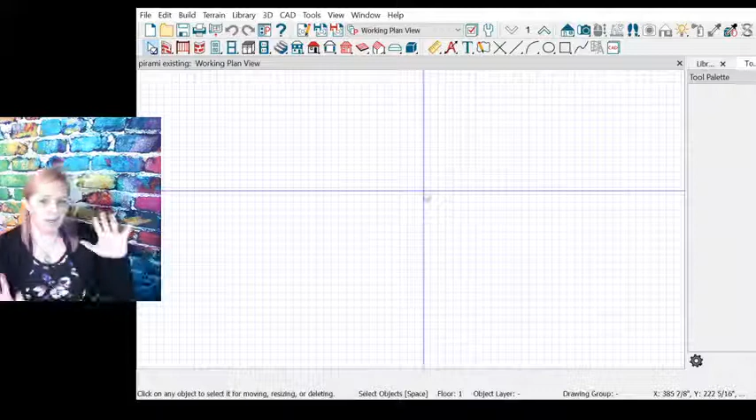All right, so we are here. We are getting started in Chief Architect. Hang on one second here. Awesome, okay. So as usual, I've already got my Chief Architect up and open, and I've got my files saved. What I'm drawing up first is the existing plan.

So this is my sketch of the existing conditions and measurements, so I can get started on drawing this. I'm going to use my exterior wall tool to just real quick start out.

This is a weird one because most of the time when people draw a house, you draw the front door down to the front, but that just feels weird to me on this project. So I'm actually going to draw it the way I feel like it. For remodels, it's a little less standard or stringent, I guess.

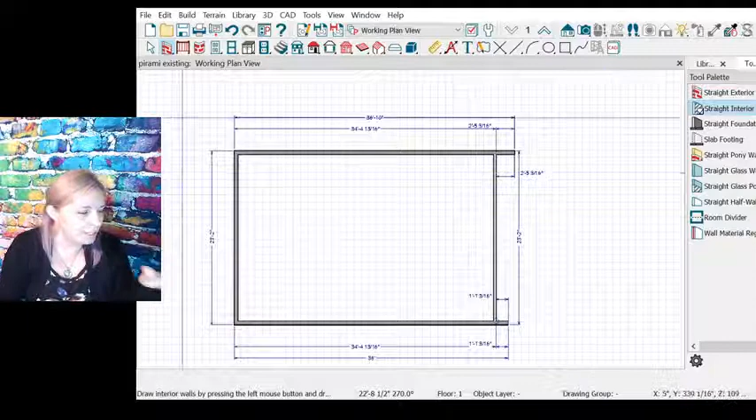So anyway, I've got my rectangle indicating my space. I guess technically I don't really need those. So I'm just going to drag this out here and we'll make it a nice even rectangle.

Now what I need to do is go in here with my measurement tools. First thing I want to do real quick - this is the existing plan, so I'm doing it basically like an as-built. So there is a long wall that connects the two halves of this house. Down on the far end, over here, are bedrooms, bathrooms, all the usual.

And then the front door is down here. This is a half wall. So then this right here is that split staircase.

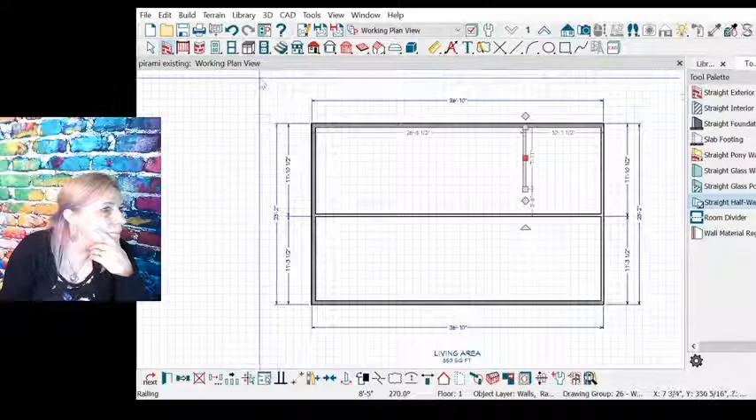I'm going to go ahead and start getting some dimensions on here. I'm going to switch over here to my measurement - interior dimension. Real quick, throw a few of these lines out here. Okay, and then that's a half wall, and we'll try that like that.

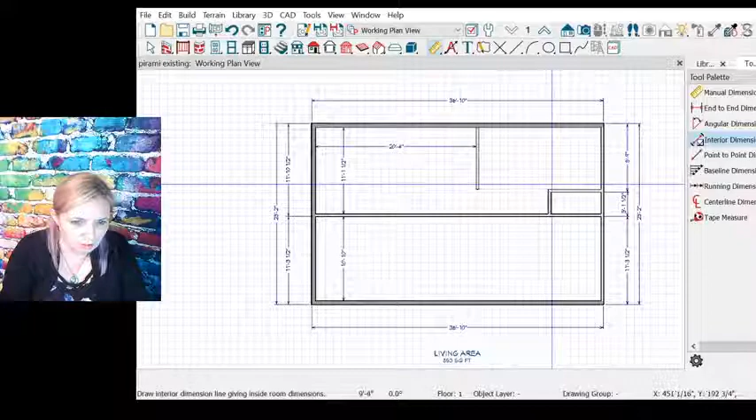So first thing we need to do is move that half wall over. And then from here to, well, some of these don't matter as much because we're not really messing with the exterior walls, we're really just messing with the interior space. So once I get my perimeter good, I'm not even worrying about what's on that half.

Okay, so you come up the stairs, we've got that. This here is off of the center line, and this one over here is 13. So this right up here in this upper left corner, this 13.5 by 20'4", that is the existing kitchen. So yay, we've got that.

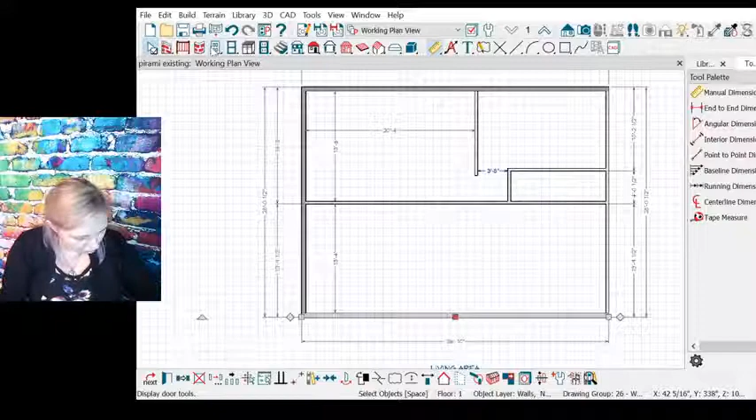Yeah, my drawing is totally whatever. It's a good thing I remember what I'm doing because my drawing does not exactly match. Oh well, okay. This is a 3'6" opening.

And then over here, there's a hallway and like that. So this pretty much lines up like that. We'll say that hallway's like that. Okay, there we go.

So I think we're doing pretty good there. All right.

There, now those two line up. Basic, oh there we go, right like that. Okay.

So this is our existing space. I'm going to quick hit save so I don't forget. There is a door over here that goes into the garage, so this is an exterior door. It is 2'8". Actually, I should change that real quick. It doesn't have that silly window thing, it's just a panel. We'll call it a panel door. All right, and the door swings that way.

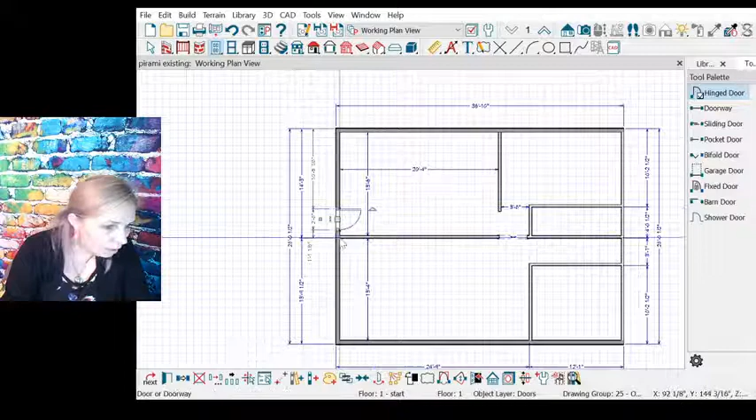And it is 6 inches from the corner. 6 inches from the inside corner over here. So 6 plus 4.5 is 10.5. Okay, there we go.

And we want to get that door location correct because that is staying, and that's going to affect the rest of the layout of the cabinets here.

Normally I would worry about the stairs, but since we're not, it's okay, U-shaped stair. I think this one does go clockwise, so we'll put that over here. Actually, yeah, we'll do like that.

Now that is, might have to tweak this a little bit because I don't think that dimension right there is correct. Yep, that's 10'3", and should be 9'6".

So right there. And then I'm just going to make this match up. Like I said, we're not actually changing the stairs, so they don't have to be perfect. I just need to have accurate measurements of where the walls surrounding the stairs go.

So there's that. And then, again, not that it really matters, I'm going to show it closed, but there's a little closet right there. So I think that's pretty much the easy stuff.

I'm going to go ahead and delete all these exterior dimensions because those don't matter, and in fact, some of those would actually be incorrect. And I'm just going to move the ones that I do need out here.

Now, we're not changing any of those dimensions, but since replacing flooring is part of the plan on this particular project, I want to make sure I leave those so that when they take these plans to the flooring store, they have accurate measurements so they can calculate the square footage of what they need.

And I guess technically I could show the front door down here. So.

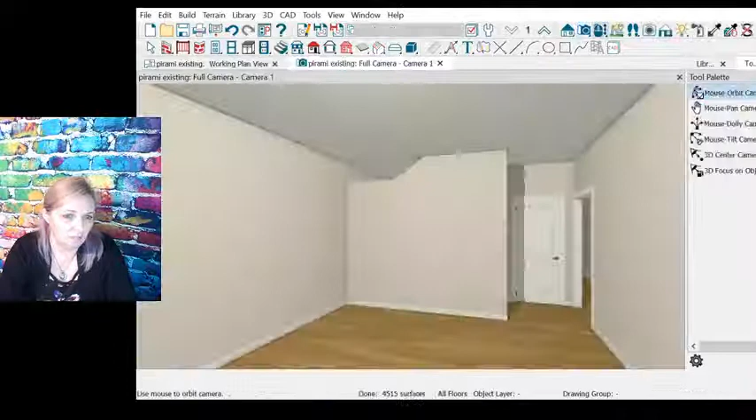Okay, that's not going to look 100% right in 3D because actually, let me see here. Yeah, see that's showing that it's actually down below. So in order for that to be accurate, hang on one sec.

Build. I'm going to build a new floor. I don't know, cancel, no, I don't want to build a new floor. I want to build a foundation. There we go.

And the only reason I'm doing that is because I want to take this, put that down here. I'm going to really quick delete that.

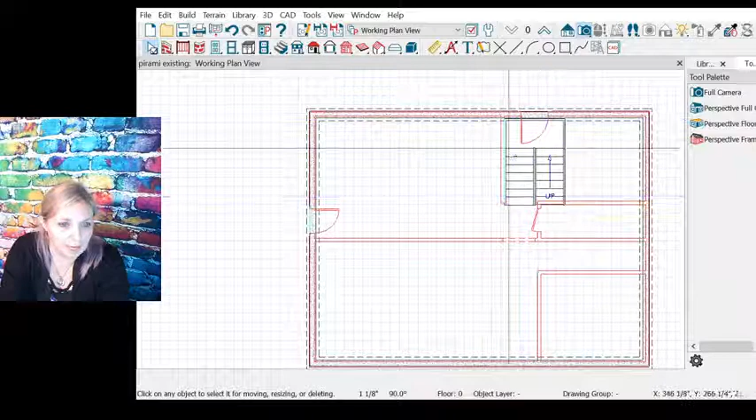Check my reference display so I can see, and actually you can see because that line is green, I know I've got my overlaps correct. That staircase is exactly where it needs to be.

So now, really quick, all I have to do is use this tool to close off this staircase right here.

I'm just building this little interior wall to frame in the staircase properly. And then right here, when I click on that, I'll call it open to below. But I don't want the room label to show, that'll get too confusing. But there we go.

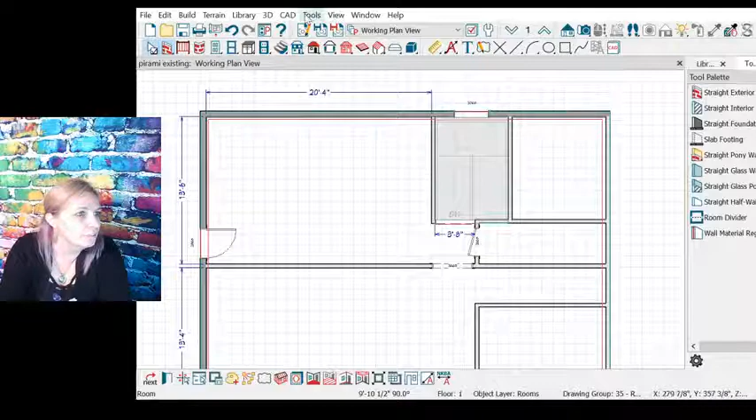So now if I turn off my reference display, perfect. And then the only thing that did is it got rid of that 9'6" dimension on that stairwell wall.

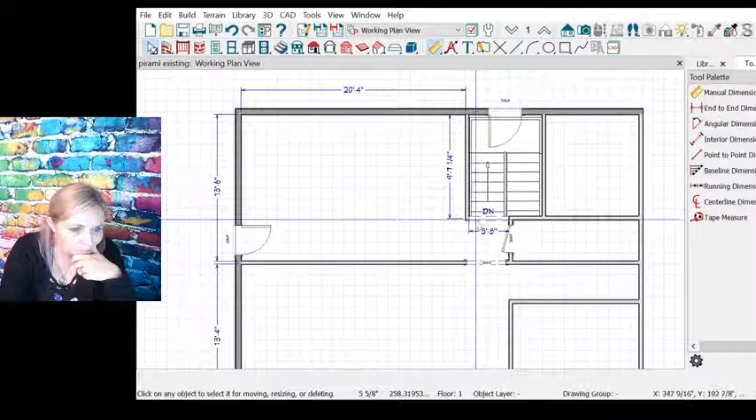So I just need to get that correct. Okay, there we go, so now it's correct.

And then I just need to move this over here so it's kind of out of the way. Perfect, so now my staircase is drawn properly.

You can see where the front door of the house is. You can see that that's a half wall. If we switch over here to 3D, now you can see that is correct, except that door needs to go down like that.

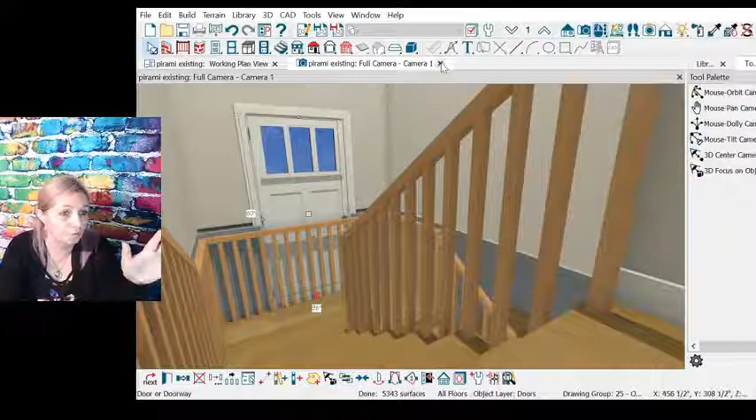Like that. Okay. Now, obviously, the foundation's different, but ballpark for what we're doing for this remodel, that is actually going to be pretty accurate.

So actually, if we switched over to this view, there's a better view of it. You can see, and obviously there wouldn't be railing on that, but

let's see if I can do that from this view. Remove railing from selected edge. There we go. So there we go, close enough. Cool, okay, so close that out.

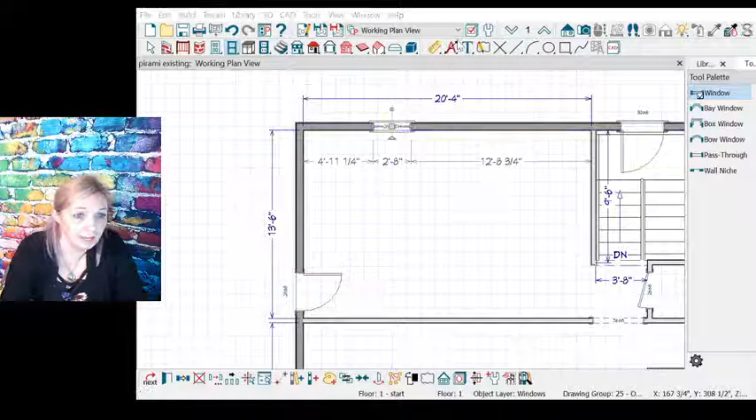And then the only thing we have to go back here, we need to do a couple windows. The existing plan has a window over here. It is a slider, not a double hung. Yeah, slider, and it is 3 foot 11.5. The height is 3 foot 2.5.

Okay, and it is 2 foot 9 from the corner. Then we have a bay window right about there.

This one I did not get the accurate total dimensions on because it's going to go bye-bye, but I need it to be bigger than that. It was, yeah, I'd say it was like that, pretty good sized. But they're going to patch that in.

With my new design, we're actually going to copy the kitchen window and mimic that in that spot on the wall, because right now we've got cabinets over here, and this right here is sort of the dining space. I think this is actually a little further over. Yeah, like that. Okay, so now we need to start throwing on some cabinets.

So under the window here is the kitchen sink. It's a 36-inch cabinet. Really quick, and this is totally a personal preference.

Hold on, there we go. I hate cabinet labels. I'm not a kitchen and bath cabinet salesperson. They have their place, but for what I'm doing here, I'm trying to show the overall kitchen. I don't like having that label on there because that just gets confusing.

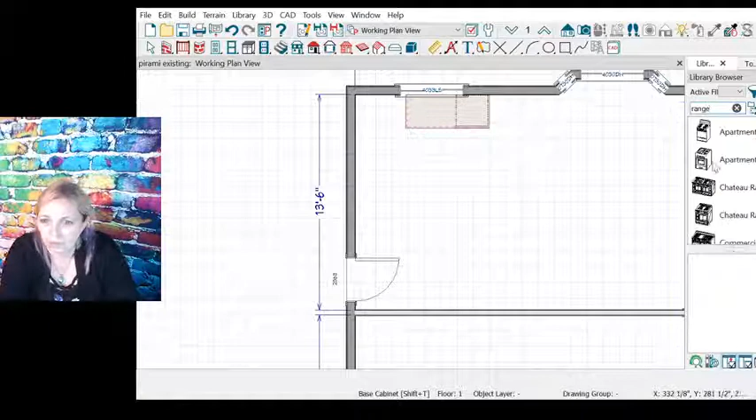We obviously have a dishwasher, so we're going to flip over here to our library. Throw a dishwasher in here. We need an electric range over on this wall. We also need a fridge.

Okay, 12. Scooch that. So I think this is a 15. Yep, 15, yay. And 12, yeah, so that's about right. So those cabinets are not big. That is really crowded in over there.

Then there was that, and that. And then I'm going to turn these facing this way. Okay, so there's that. Then over here we had, they had added this in later on. This is, I believe, 3 foot wide.

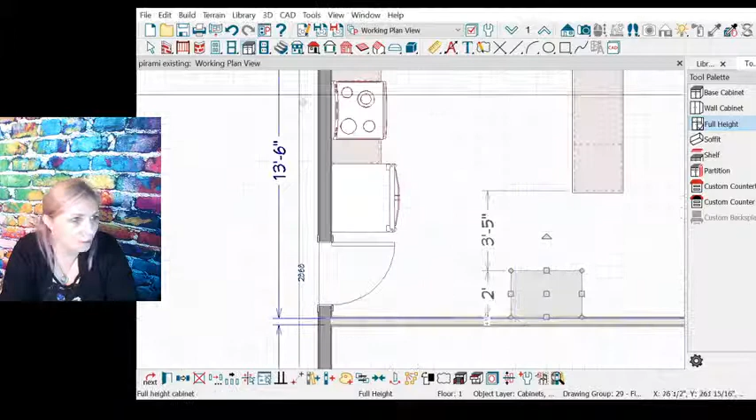Along with your standard base. And again, I think this was maybe a little wider as well. This one had an upper. And then over here we have a 12-inch upper there. This one needs to be shorter because the microwave goes underneath it, so 36.

Let's try 24. Let's see what that does. And I definitely remember having that corner unit because we had a discussion about how pointless some of those corner unit ones are, but all right.

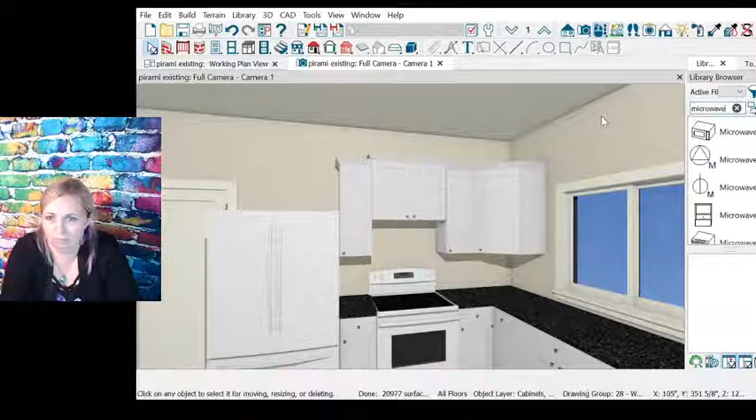So in 3D, come out here and look at this. Now we see the microwave real quick. And that is okay. Technically, I think the microwave's a little bit too low, but in my drawing, I'll make it right.

So, and we do have an upper cabinet here above the fridge, and it is 24 deep. Okay, so that looks correct, and then the only other thing is they have a countertop that extends out just a little way.

So actually I think maybe this window is just a little bit too large. Let's drop this down to like that. Okay, so this is the existing kitchen.

And then this is the existing family room. There is a sliding glass door over here. And there is a fireplace down on this end.

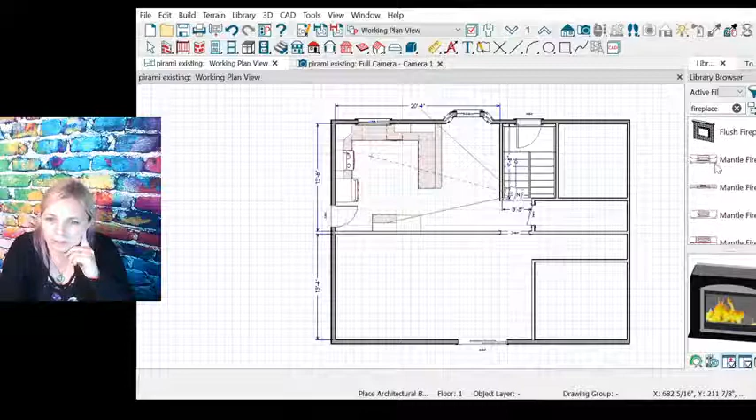So let's, some of these are so elaborate. You wonder why they think that's the average template. Let's do that one.

Okay, so that's just about centered. There's no windows on that exterior wall, and the wall where the fireplace is, that of course backs up to the garage. I'm gonna leave that alone.

So I think that pretty much is, actually I think that might be 1, 2, 3, 4. Yeah, it was about 5.5 feet from that back door. So there we go. I am going to go ahead and save this.

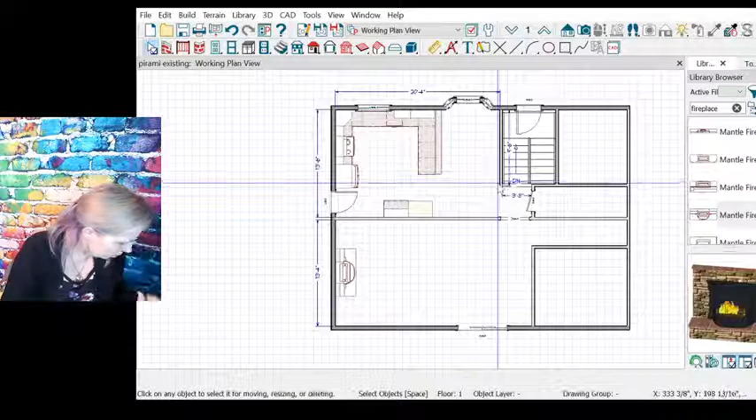I don't see anything else right off the bat. I've got my dimensions here and there. I don't see anything else that I'm missing. 10 foot 6, so 2, oh, sink. There we go. So 2, 4, 6, 8. I'm off by just a tiny bit here. I think that's a smaller cabinet.

There we go. 2, 3, 4, 5, 6, 7, 8, 9, 10.

Okay, all right. So this is our existing plan. I'm going to go ahead and hit save, and then I'm going to save as.

And I always do proposed. Sometimes I'll do version 1, version 2 if I'm a little concerned about whether they're going to like something, or if we talked over multiple ideas. But the day I was at the house, we actually had a really clear plan of what we think is going to work for this space. So for right now, I'm just going to leave it as proposed, one and only, not worry about version 1, version 2. If I need to later on, I'll do that as well.

So, all right, we are there. We're moving into the proposed plan. So now I'm going to start deleting a few things.

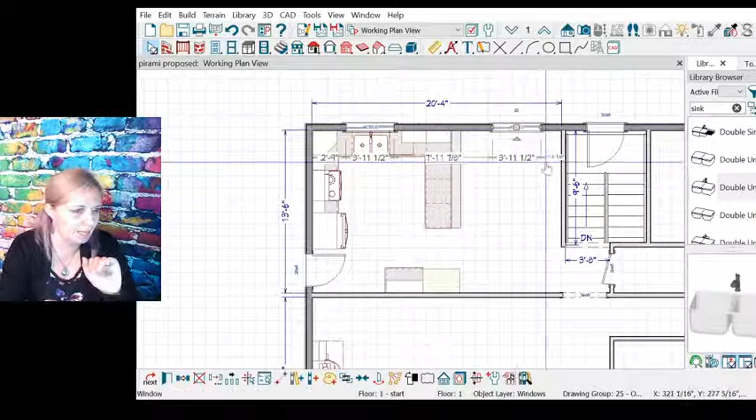I'm going to delete this bay window. I'm going to copy and paste this other window, and we'll figure out the exact layout or dimension here in a little bit. Right now I'm just going to make it 8 foot between the two, so we'll call that good.

The other thing we want to do is get rid of this, and then this. Instead of having the big giant long wall, first I'm going to delete this doorway, then use my break to come over here and peel this back. Sometimes it doesn't like that.

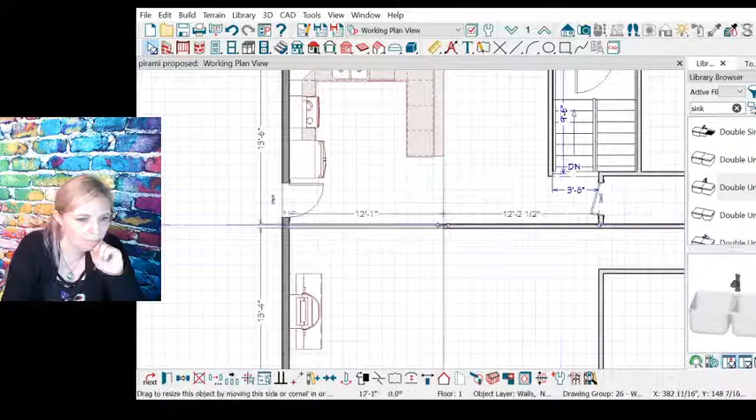There we go. And we decided we wanted it to be 5 foot long from that corner. The reason we want to keep some of that intact is because although we're trying to open up this space, the way that door comes in from the garage, we want there to be a little bit of a space for a coat hook, letting the kids hang things up there by the door, and to create just that little necessary bit of separation between the kitchen and this living room.

Create just a little bit of a nook in this corner for a plant or whatever, and then the furniture will be what defines the rest of the space.

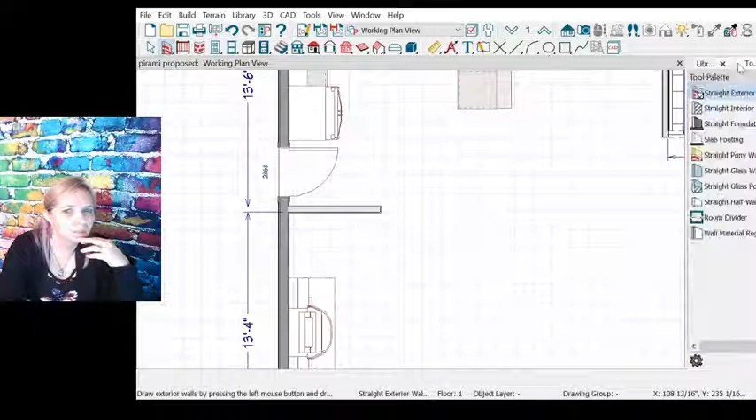And we did talk briefly about doing just a little tiny hook on this, almost a piece of trim work more than wall, if anything. Like 6... oh, I want it to be... yeah, I don't want to move that, I want to move this end.

There we go, so we'll do it like that, just enough to sort of frame that. I don't know if we'll actually frame like a 2x4 wall or if we'll just use a piece of molding or something, but just something to kind of cap that end to contain those coat hooks that are right there. But that wall has not moved, so that's good.

Okay, so that has opened that up. We don't really need the invisible wall thing there because this is all one room. So now we have that space.

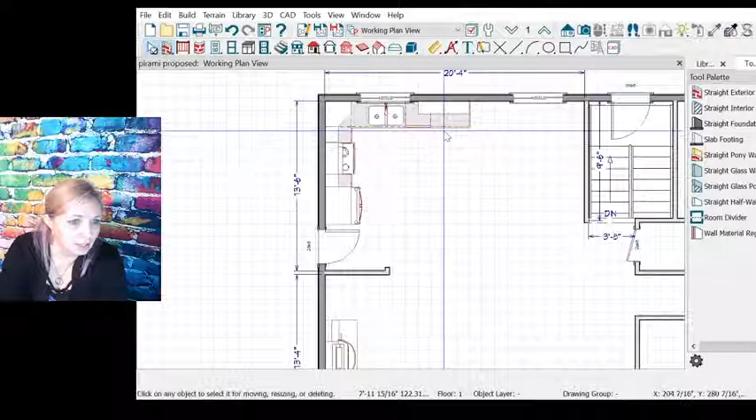We're going to get rid of this little countertop that's here, these cabinets, this cabinet, this cabinet. We're going to change that later. Yeah, let's get rid of that because we don't want that corner one we talked about.

Okay, so then what we're going to do is move this, the fridge, over here, and this is a 12-inch base. I like that. I think we need some separation between the dishwasher and the other.

So this is that upper cabinet, and then we're kind of going to mimic this on this side. And we had talked about possibly turning those into wine cabinet ones.

So when we get to the elevation view, I'll make that look really awesome. So it kind of flanks the fridge.

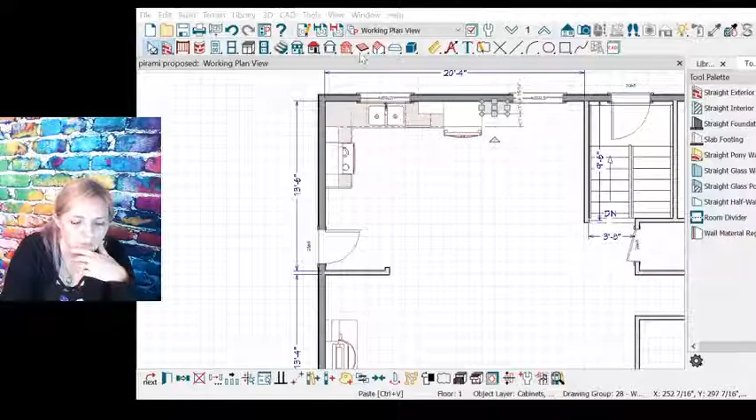And I'm actually going to make that just a little bit narrower. I think we're going to go less than 24, maybe like 18. And do the same thing here.

Because we're going to be adding a lot of storage in this island, I'm going to scale back a little bit on some of those upper cabinets, because I think it's going to make the kitchen feel much more open. Although I am going to do one here.

There we go. Now the other thing we're going to do is get rid of, hold on, see, now I'm flipping over to my proposed sketch.

For what we were thinking about doing, the range, we're going to have to switch to a different unit because that is a range that is not a flat back. That one wouldn't work in the island. There's my microwave, so I just got to pull out a few of these things here.

Let's make that a 2-foot base. Make that a 2-foot base. Actually, let's make this a 3-foot base.

And then I'm going to do full height, and do those there. I'll probably do a little bit bigger.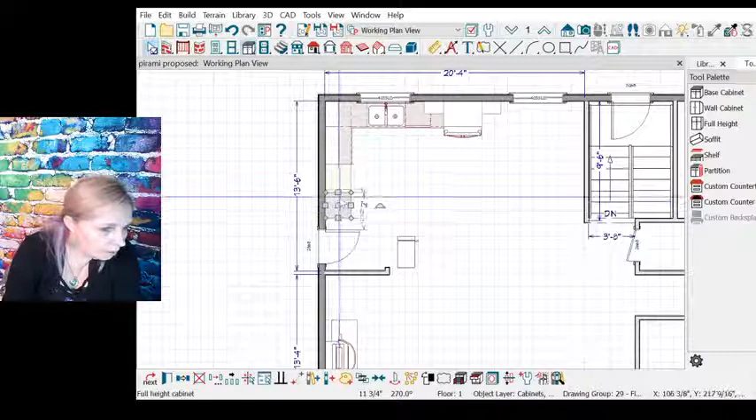Let's do 2'3" and 2'3". There we go.

So if we're looking at that in 3D, you can already see how much different that kitchen looks. But that gives us those double height pantry cabinets, which are amazing. You can get so much storage in there. And then I like how that opens up around the window better, how it kind of dies into the corner.

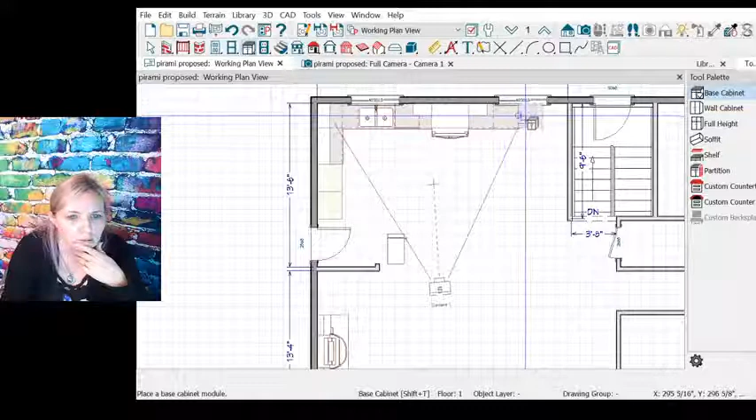Yeah, that's really cool. Okay, so then we'll go back here to this plan. Like that. And we're not going to do any other upper cabinets because of where we want that window to be placed, because I really like the symmetry.

There, look at that. So you've got this unit right there. I'm going to change this just a little bit. So front, sides, back, we can do... Actually, what I want to do is this, because I remember trying to do this before, and it wasn't so much what was on the inside, it was just by simply changing the door.

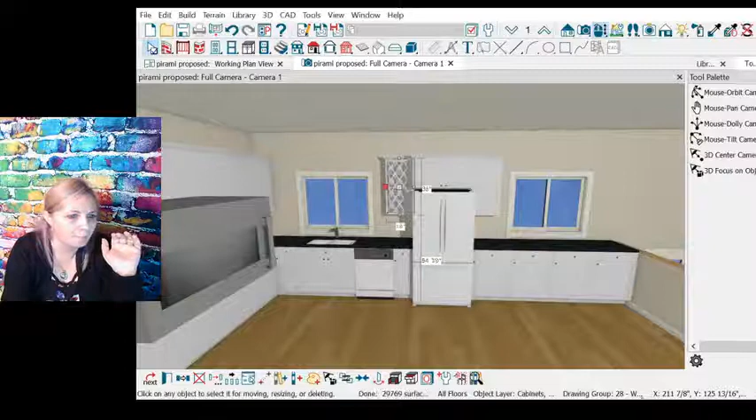Yes. Ha! There we go. And then I'm going to copy and paste. Perfect, okay.

That looks really cool. And yes, I have a microwave floating in there, but that's okay.

All right, so now we're going to do the island. So I'm going to start by placing my first cabinet roughly there. And the reason I started in front of the fridge is because that's going to be the biggest pinch point in this kitchen, so I'm going to do 3'6".

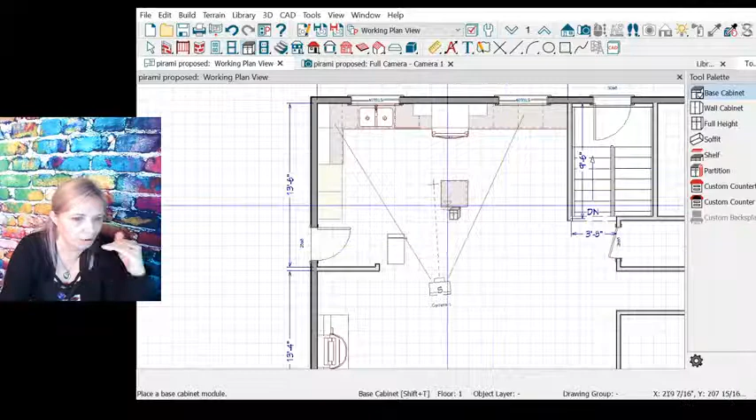If you can do up to 4 feet, it's ideal because then when you've got those doors open, you've got space behind you. But if you can't, 3 foot's the minimum. So we're going to start with 3'6" and then see where this all pulls out, and then go from there.

So we know we need that. I also need an electric range without that back panel, because you see how this one here has that upper piece? Can't do that on an island. So here we've got this, and we've got the oven right next to it.

Now we need a cabinet on this end of it, obviously. And it looks like we've got a little more space, so let's try one more, because I think what we figured out... 1, 2, 3... 1, 2, 4, 6, 8, 9, 10 and a half.

So we're at about a 10.5 foot island. So let's check our perimeter, our measurements here. We know that here we've got... come on, let's see if it lets me do it. Okay, well that's 4'4", that's nice.

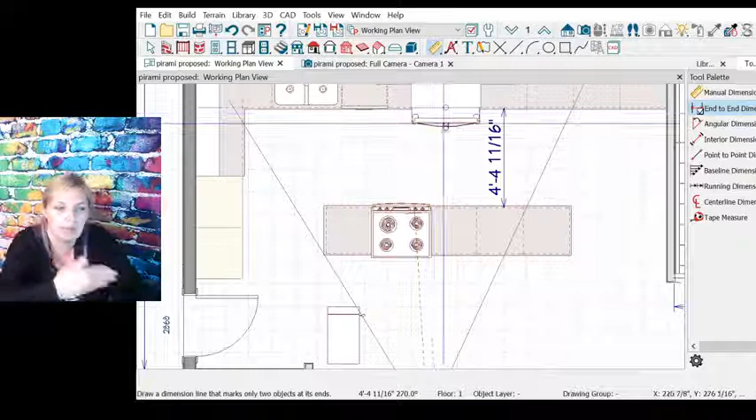The client might look into a counter depth fridge, which would save us a little bit of space, but having these two appliances close like this, the more space we can give it, the better.

I'm going to delete that microwave because actually we're going to use an under cabinet, I believe. So actually I'm going to delete this one right here. There we go, microwave base.

And then, I don't know if she's going to do a built-in or what, but let's see if we can. And I don't know why these templates, they're...

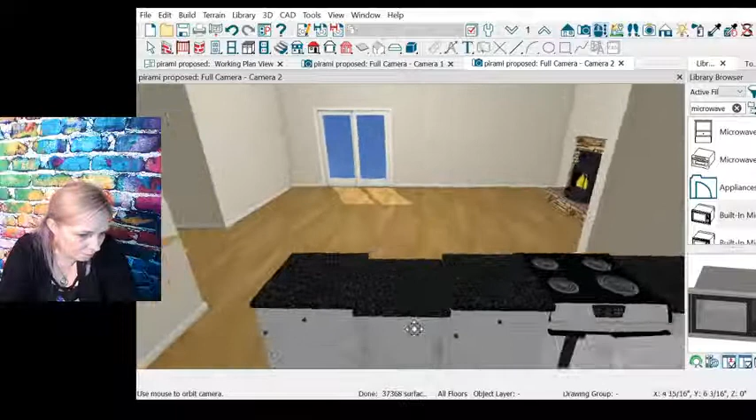Too short. Seriously, cabinets are 36 inches tall. Also, the toe kick is only 4 inches. Some of these templates are weird. See, now that fits. Okay, microwave.

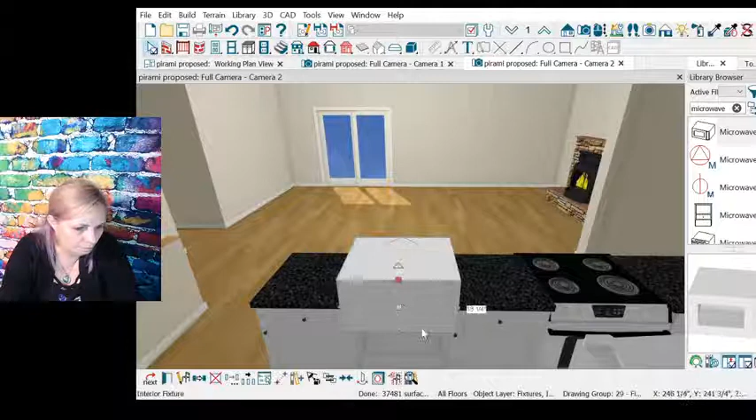Well, you know what, it might not let me, but I'll fix that on an elevation later. But look at this right here. You can already see how much more open this space is. So you'll be able to sit here and see what's going on there. I think this is awesome.

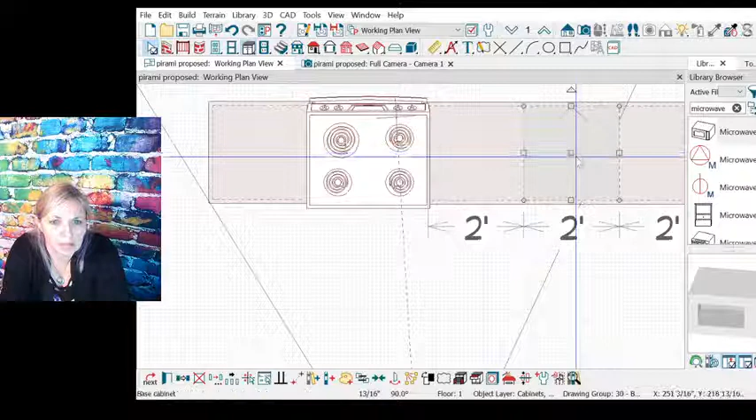Okay, and then we have up to 4 feet that we could do for this island. Why is that not lining up? Sometimes these snaps... there we go. All right, sometimes the snaps just don't want to snap.

So by up to 4 feet, what that means is we could have some smaller, like 12-inch deep cabinets on the back side of this island with then an overhang. Generally that works best either with closed storage for things that you really rarely use, like holiday decorations or plastic cups. Or if you're doing something decorative, you can do like bookcases, but you're going to have people sitting there, so open bookcases usually aren't the best.

So we were doing some measurements here, if I remember correctly. So there we've got 3'7", that's awesome. They want as much seating as possible here, and we talked about a couple different options.

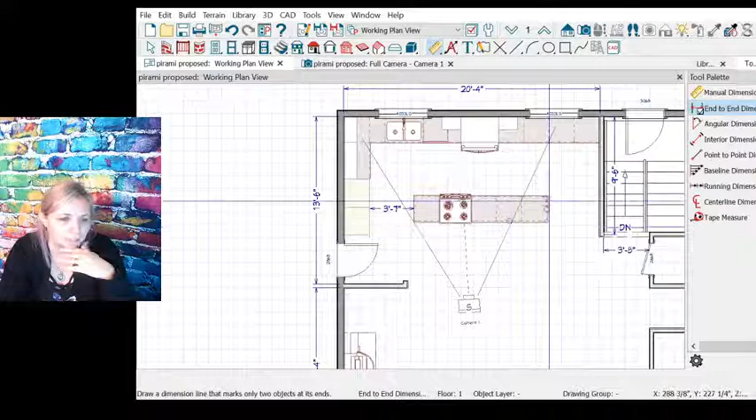The first one is simply having this overhang that comes all the way around so that you can have people on the end and on the long side. We'd even talked about the possibility of maybe doing like a dropped section, like almost a half circle or a 3/4 circle down here at the end, but I think for right now I'm going to show it the other way, and then if we want to go back and add that unique feature, we will.

So I want to first come over here, and it always wants to... there we go, right there. So first we're going to give this a 1 foot overhang, then we're going to come here. I'm going to use the break tool to drag this over.

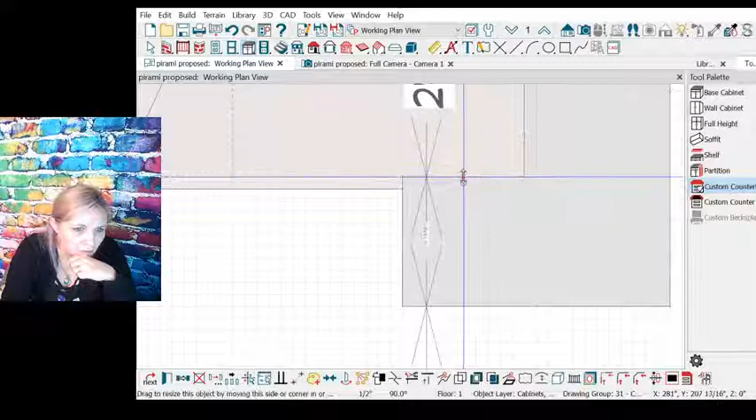Okay, need to line this up. I guess we can do it together. And then, again, we need a 1 foot overhang. And then we're going to carry this on down.

And then this actually needs to scooch forward, it looks like. There we go. So we have 3'7" there. We're going to have to do a, it's not going to let me do a point to point, I don't think.

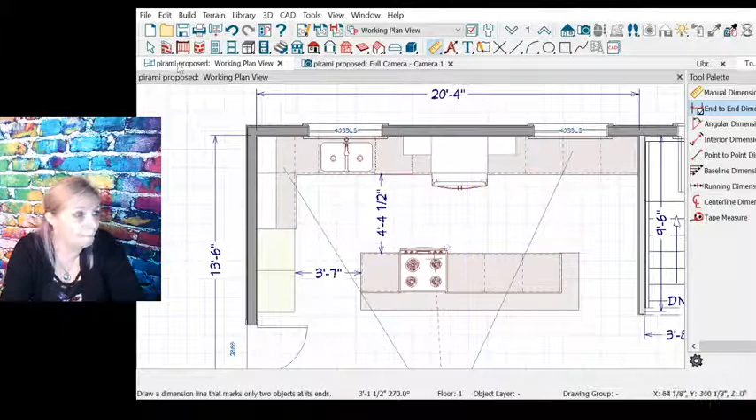So yeah, right there we have 4 foot 4.5. If we were to do here to there, we're looking just over 3 foot. So that's actually not bad at all. And then down here on this end, if it will let me, which it's not. Okay, point to point. So we have 3'2". I'm actually going to take all of this

And do that. Okay, and the reason I want to shift it like that is because, yes, you've got the pantry cabinets down on that end, but then on this end we're going to have bar stools wrapping that island, and so we want to make sure that we've got plenty of space.

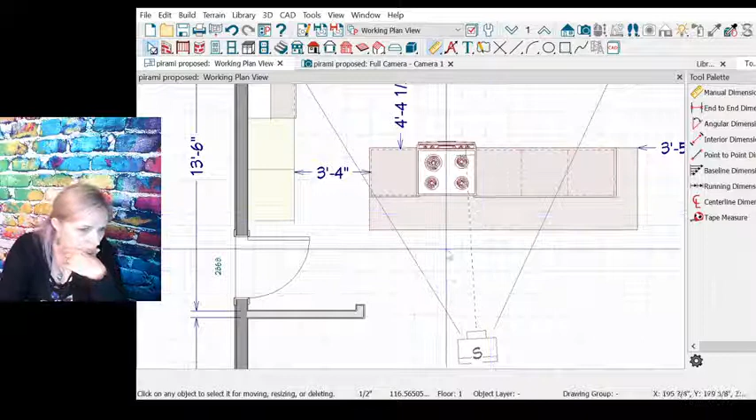I actually think I want to make this overhang just a little bit bigger here. I want to make this, we'll do 18 inches here and see what happens. You still want to have your space here, but we've got 3 feet easy right there. So you can still get in, hang up your coat and get past all this pretty easily.

And then over here's the living room grouping, and over here's the dining room table. So I'm kind of liking this. So let's go back here to this 3D camera view. We had talked about doing some different cabinet heights. So something like that. And then if we rotate over this way, I think these pantry cabinets need to be taller.

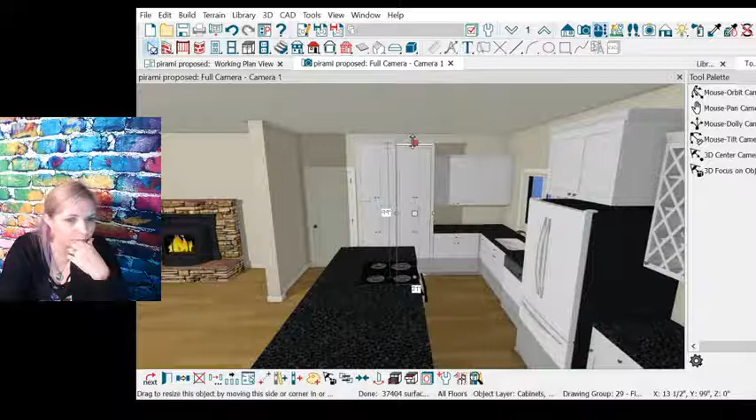So, and there is a vaulted ceiling. So that is the one thing I didn't put in the plan. The client knows that though. So we're not doing all the way up to the ceiling cabinets. I do like this. The client also does like a little bit of space up top for some decorative items. So there's that.

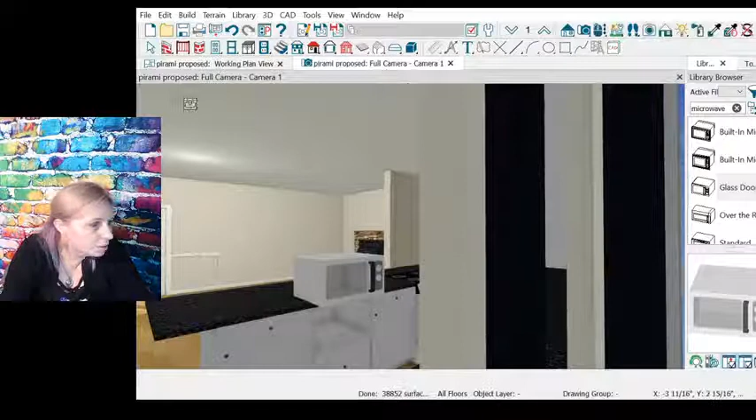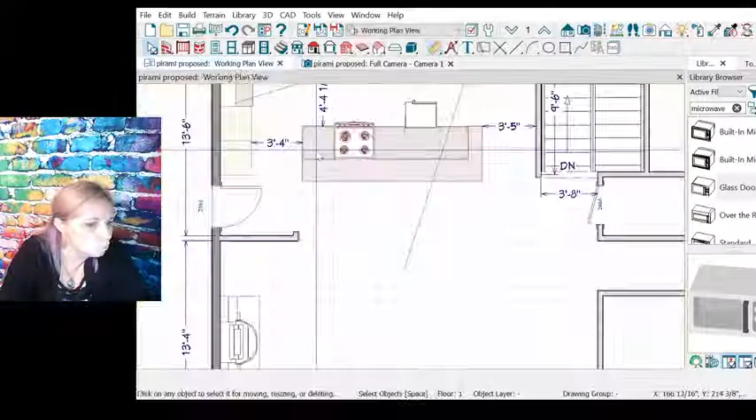And then, okay, so then here's that island. Wonder if I can get a microwave in there. Sometimes you just have to be, I don't want to say smarter than the machine, but definitely more persistent than the... Let's see, floor to top. Come on. Ooh, no.

Alright, so we're just going to have to pretend and imagine and know that that is a microwave spot. Okay. Perfect. Alright.

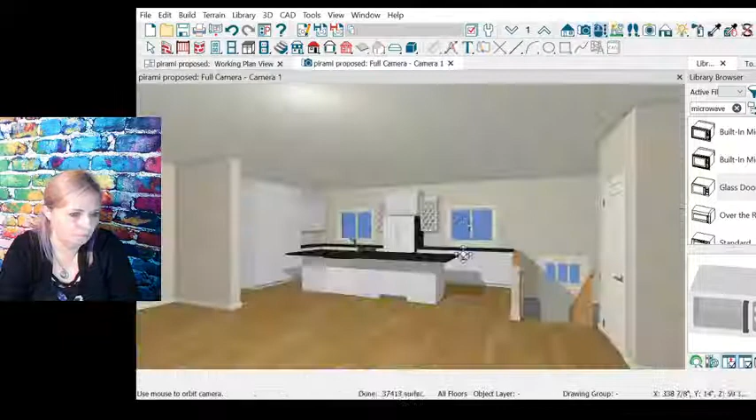So I'm thinking that might end up being kind of about it. Let's look at it from over here if we back up a little ways. Camera. Okay, and you wouldn't actually see that. That's just a weird gap, just the way the template's set up.

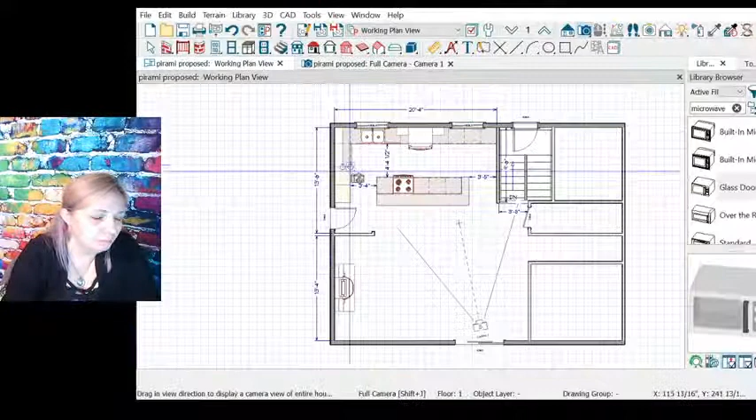Honestly, I should probably draw a half wall underneath here because we'll have to have electrical for the oven, and it's usually, plus it supports the countertop a little easier. Straight half wall.

So if we go back to that camera there, you can see. Perfect. And we could decide whether we want to wrap this end or not. I think that looks really nice. Let's see if we can find some cool bar stools.

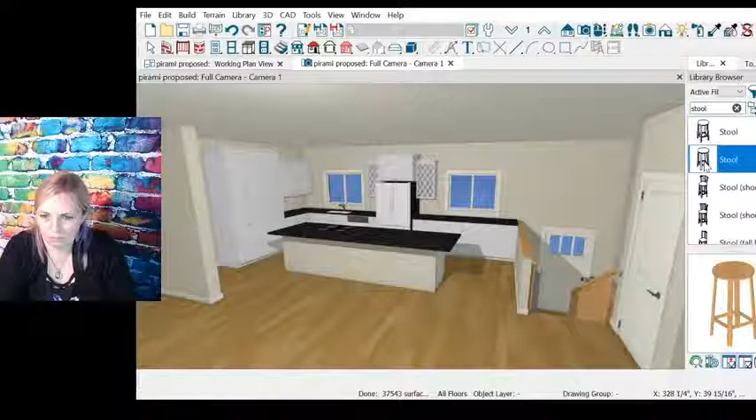So we can easily get 5 people to fit here, which I think is more than enough for what this client is looking for. So we had talked about the possibility of curving that in, so maybe let's show that.

No, I don't want to curve it out that way. I want to do that. So almost like a half, yeah, there we go.

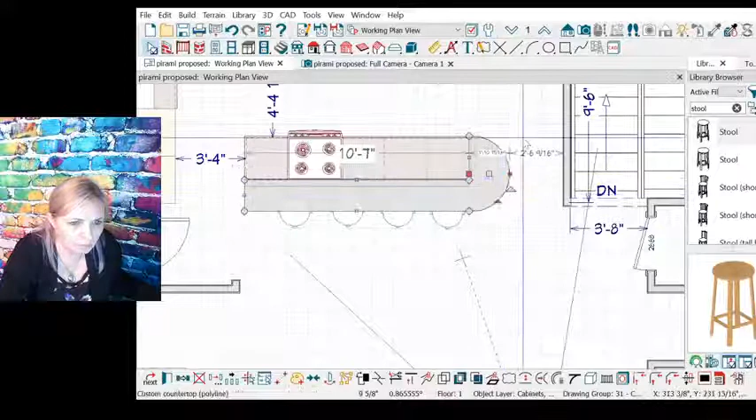So if that's the case, we can actually fit one more. So that's 6. Okay. And there you can see what that looks like there on the end.

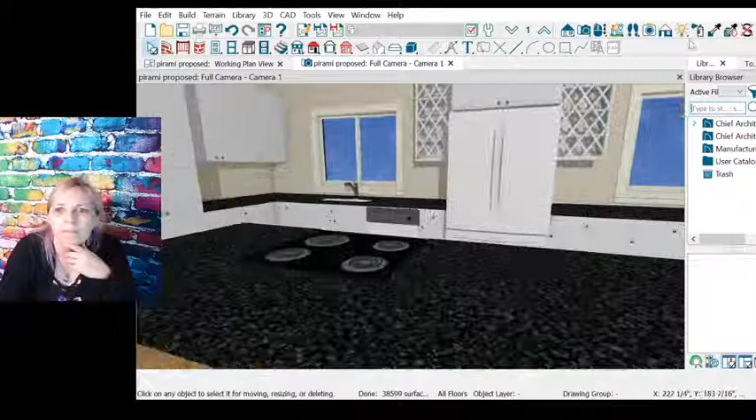Okay. So right now I'm going to go play with a few materials. I wonder if there's a... Actually, can't let. Simple. Instead of trying to find a different fridge. There we go. So we're going to do that as the stainless.

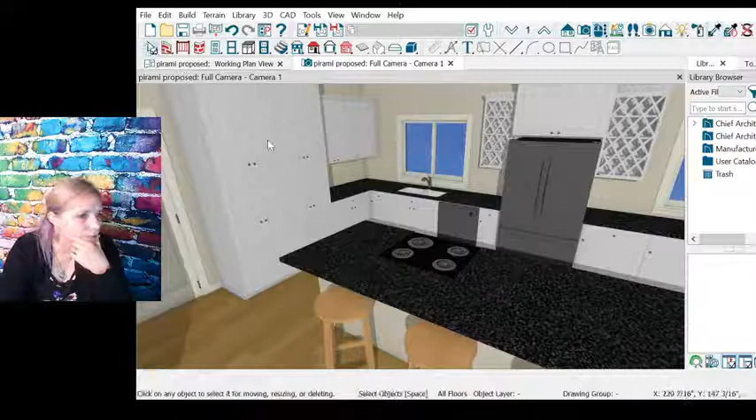Let's flip around here. We'll also do that. Okay. And then instead of the bright white, she kind of likes the more muted off-whites. Actually, her cabinets right now are kind of a rustic. So let's come on in here. Let's look at materials. Okay, cabinet. Well, let's do... We'll start with the door just because that's a little larger.

No, that's too much. Okay, so distressed, here we go. Light distressed. Do that one. Okay, so now that we like that one, and that's not exactly the color we'll choose, but it's a good starting point, just to show that this is something different than the crisp white.

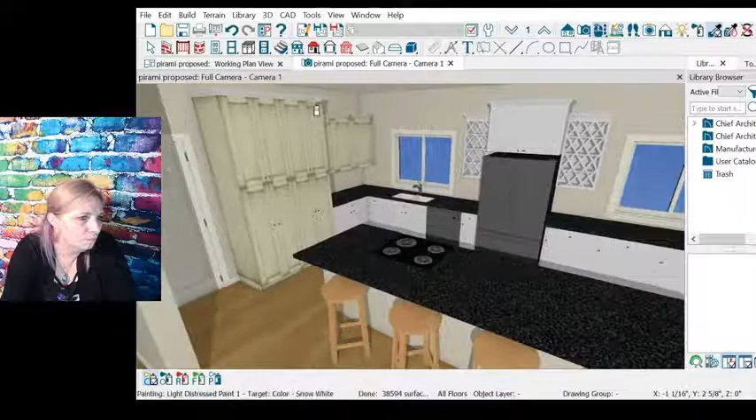Get that crown. I like this paintbrush tool, it makes fast work of some of this. I mean, you have to get all the little bits and pieces, but it's not that bad of a deal. Gotta get the toe kick.

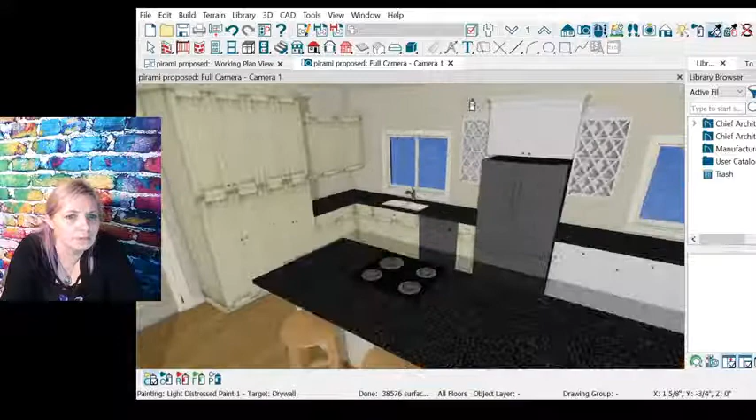Even the dishwasher is in a cabinet. Oops, go too far, you get subfloor. Alright, and then we got some uppers. And I actually, ooh, that might be kind of a cool thing. Maybe we'll do that.

And when I say something like that and then stop talking, it's because I forget that I have to tell you what I'm thinking, because you can't read my thoughts.

What might look really cool there, since we are doing kind of a unique focal point there, is to do maybe wood cabinets up there. So let me kind of loop around this way.

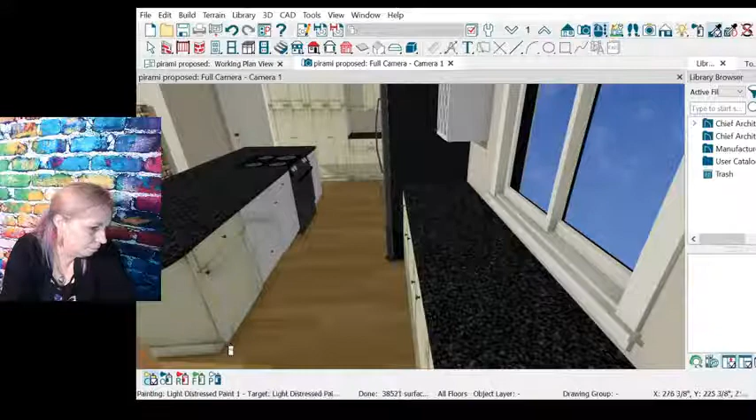Okay. Oh, I saw a little bit of backsplash peeking up there. Hold on. So on this, no backsplash, thank you. Oh, and it looks like I didn't get the toe kick there, so.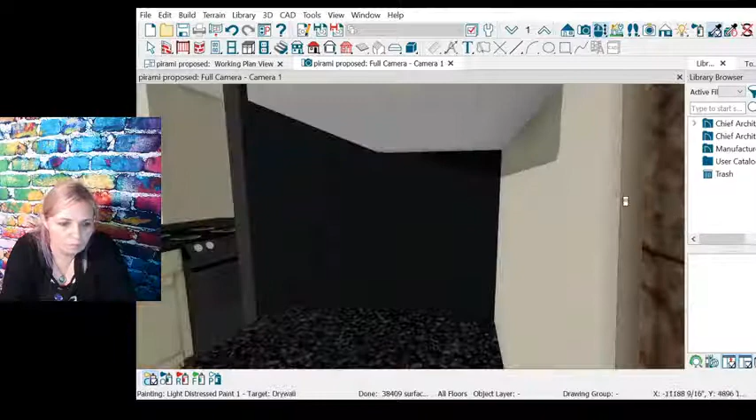Okay, so that's that, and then hold on one sec. Alright, so I got kind of my rustic there. Now I'm going to loop over this way. And I'm going to do, like I said, I think I'm going to do kind of a rustic wood up here. So instead of, let's go to materials.

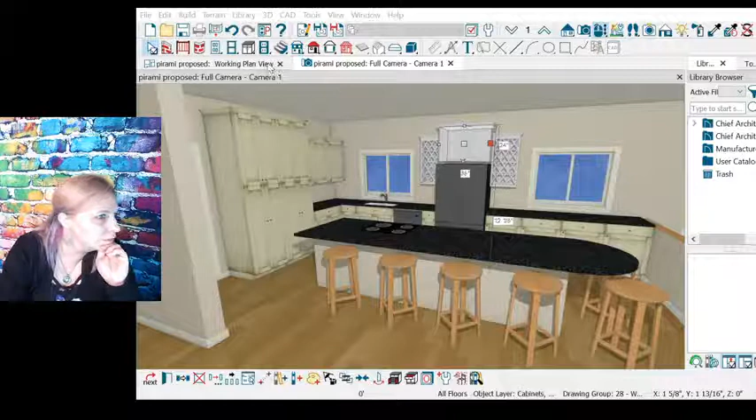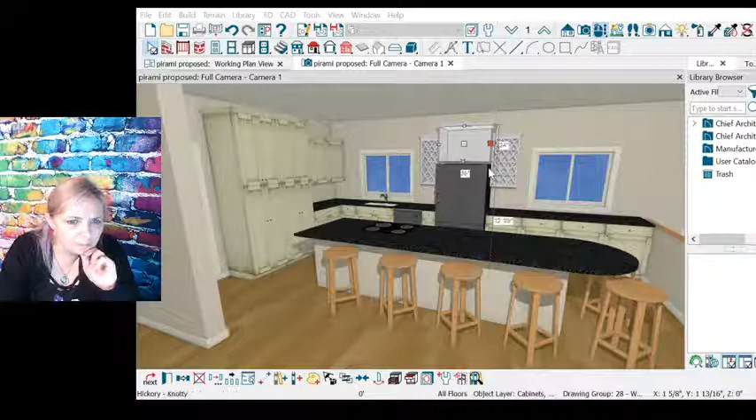Wood. And I'm thinking, no, let's go back to hickory. Hickory, for the purpose of showing kind of what we're thinking here, this might be, yeah, pretty cool. Okay, and then again, eyedropper.

Just gotta kind of rotate around and get all my edges. Okay. And I've got underneath and around. Awesome.

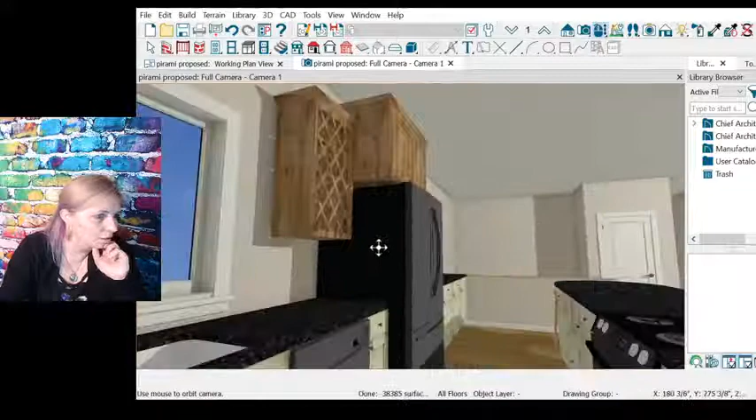So that's kind of a cool look, because it kind of creates that focal point. It sets it apart, it makes it not quite as weird that you got this fridge in the middle of the wall. It kind of, I like it. So now I'm also going to copy that wood on these bar stools.

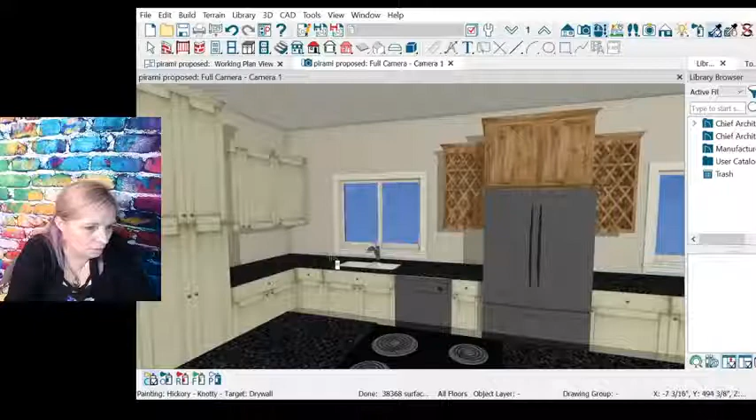And I'm going to change my stairs. There we go. I'm trying to remember what we talked about for countertops. She wanted the black stainless appliances. Okay.

White, maybe white rustic, distressed. She was thinking more of a lighter countertop. So we don't want this black. Let's see what we can do here. Materials, we don't want to do black granite.

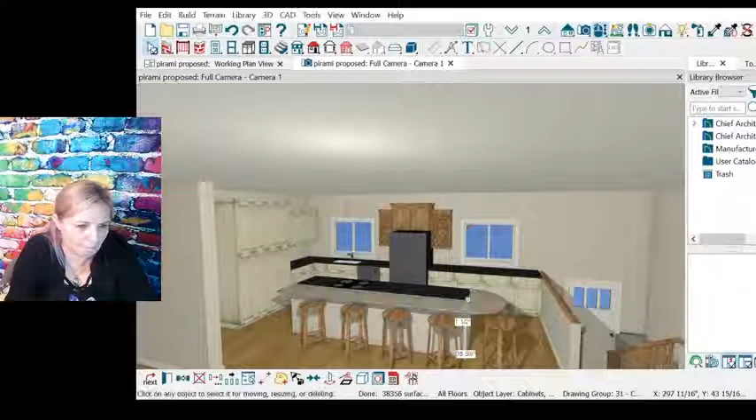Ooh, I kind of like something like that. And I think that might work. Granted, we'll pick these out in person for sure, but for an illustrative purpose, I think this will work. There's that one in the corner.

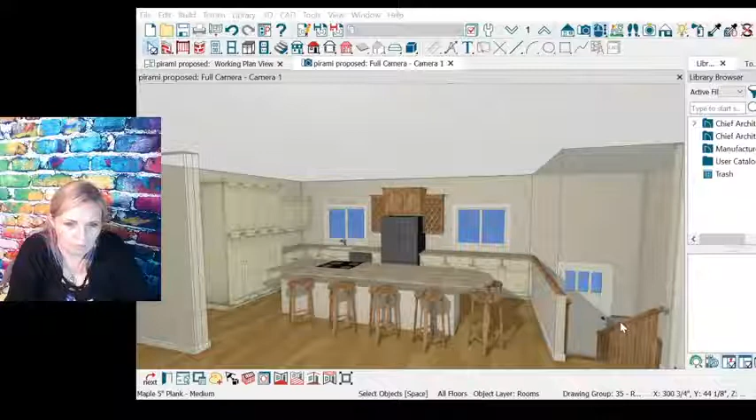And then we'll probably end up painting the walls. We'll add some decorative accessories and things. We need the floor to be a different color, the floor needs to be darker. There we go, not a ton darker, just a little bit.

And then what else? I feel like I probably should show the wall in a different color, because right now it's just basically showing as drywall.

Ooh, yeah, that's it off. Okay, I'm gonna copy, paste. And then we'll kind of spin around here. Well, not totally spin, but

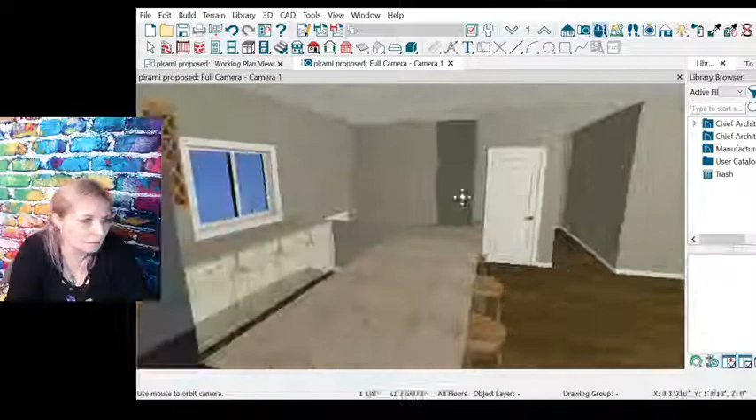I like this color, it has a little bit of depth to it, tiny hint of green. Countertops aren't my favorite, let's see, there was one other one that I kind of liked that was close. It was slightly darker, that's what it was. Yeah, I think I like that one, just for the purpose of illustrating.

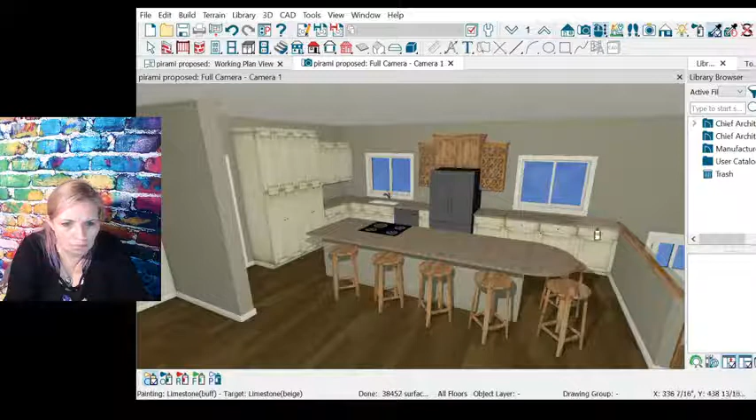So there we go. So that is a pretty nice kitchen plan, the fireplace, the living room. I'm leaving the window and door trim as white because that's what they've got in the house. We'll choose probably a soft white, maybe like an alabaster or something, but I think that works pretty well.

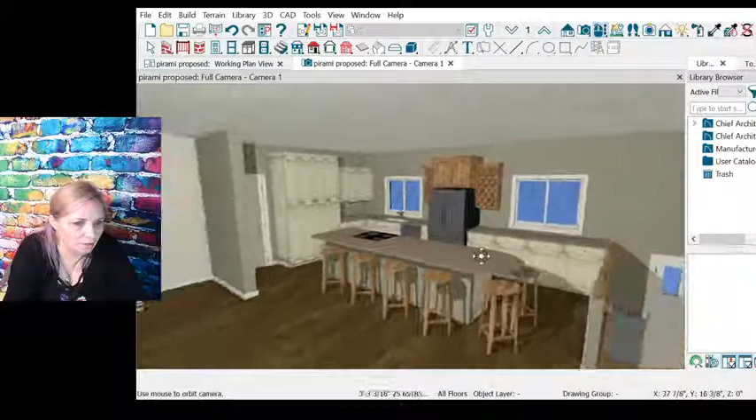I like this kitchen. We've got a nice compact work triangle, lots of eating and countertop and storage space. This would be a great spot to do baking underneath the window. Could have a little plant or something here. Awesome, well, yay! Okay, so

There is my kitchen. I'm actually going to do a screenshot here. Oh wait, we wanted to do a little bit of lighting, but the lights in this are not the greatest, so I'm not going to worry about showing her that. I'll just find some from my vendor that I like. So right about like that looks like a good screenshot. So

Okay, hang on one second. Sorry, you probably couldn't see that. Alright, oh, it says I'm chat. Chat's disconnected. Aww. Well, apparently I'm not streaming anymore.